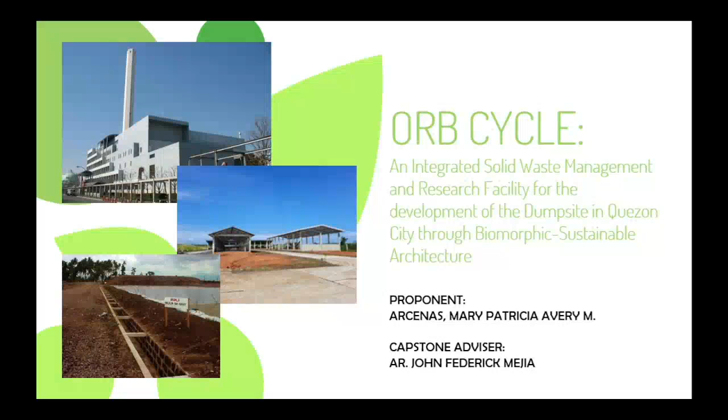An integrated solid waste management and research facility for the development of the dump site in Quezon City through biomorphic and sustainable architecture.

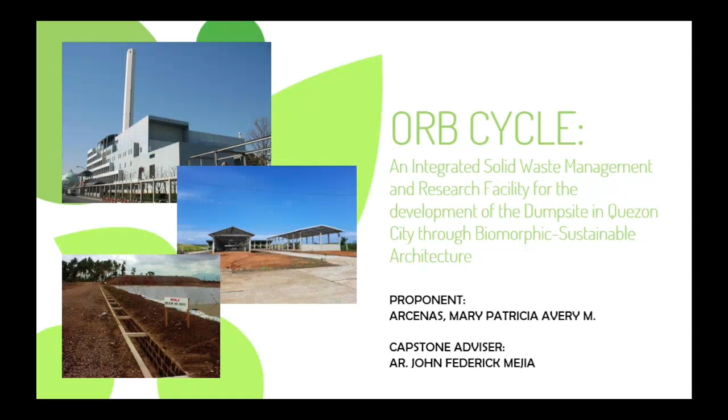Introduction. The Philippines has poor management of waste. Dump sites have been a way of disposing garbage, and the environmental effects on our air, water, and land are contamination and pollution, which have already contributed badly to global warming and climate change. If these dump sites are poorly managed, this can cause various diseases and illness that can spread and affect the local residents around the dump sites.

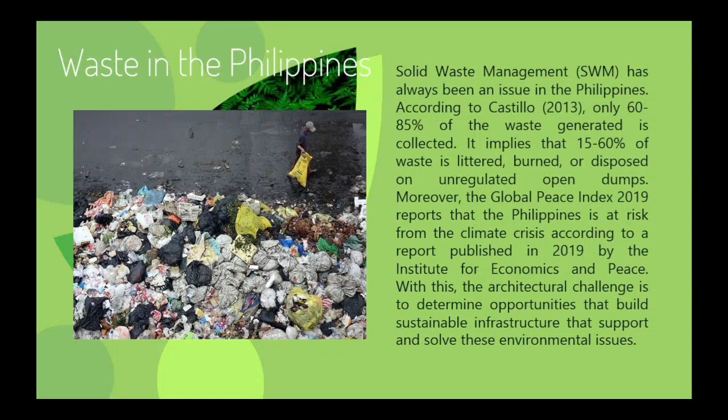Moving on to the project details, the project is a solid waste management and research facility that will embody multiple types of facilities that can handle massive loads of waste in an organized and sustainable process, while giving potential to be developed as a manufacturing site that can process raw materials through the use of innovative and sustainable facilities that are respectful to the environment.

The problem statement is that landfills are a temporary solution and not enough as a way of disposing of waste.

The main points are: how will my project impact solid waste management? What businesses can my project offer? What are the effects of reopening the dump site to the communities, and will it help in reducing environmental, health, and safety risk?

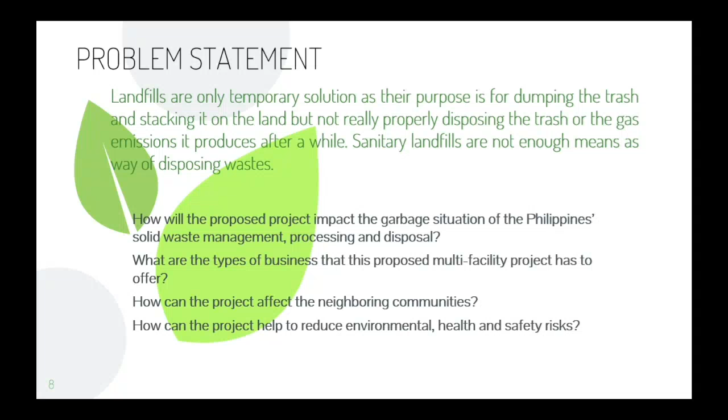Project objectives: to educate communities and support sustainable solid waste disposal research, improvement of the Old Payatas dump site and establishing new facilities related to solid waste management, utilization of the technologies from the sustainable facilities, and environmental awareness and responsibility.

The project scope and limitation is intended for the architectural and health progression of the Philippines, as well as for the encouragement and showcasing of the development of architecture towards industrial structures, prioritizing the perimeters of Quezon City in Metro Manila.

The client for this project will be the National Solid Waste Management Commission, a major agency that manages, controls, transfers, transports, processes, and disposes of solid waste in the country, and the Department of Environment and Natural Resources, a primary agency responsible for conservation, development, and proper use of the country's environment and natural resources.

The case studies that are the basis of the project include the Shibuya Incineration Plant in Japan, which incorporates a new stoker technology with clear gas emission regulations.

San Pablo City Sanitary Landfill and Materials Recovery Facility, which has an in-vessel facility that processes the toxic fluids from garbage and turns it into organic fertilizer.

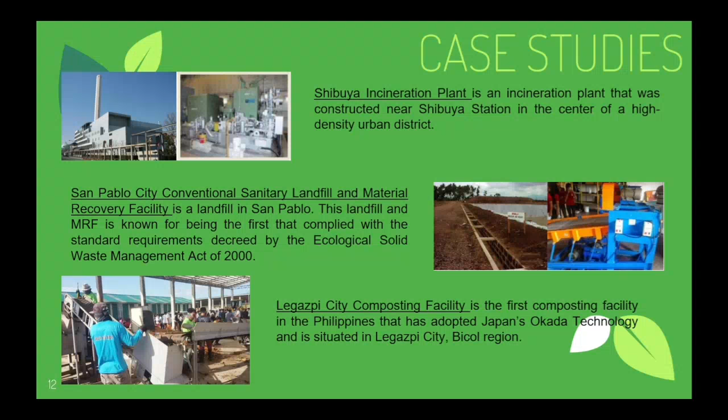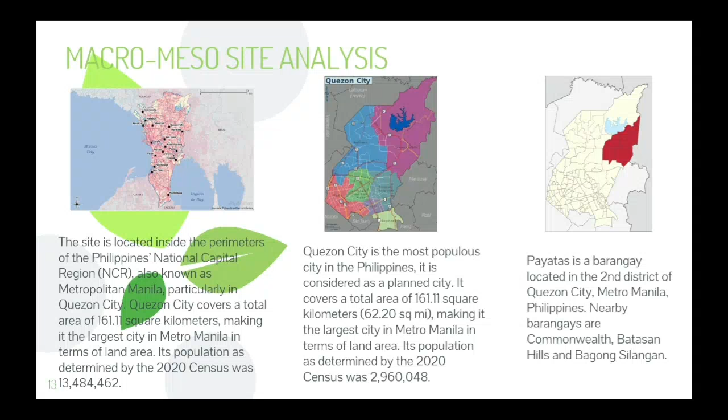Next is the macro-meso site analysis. The site is situated inside the perimeters of the National Capital Region, also known as Metro Manila, particularly in Quezon City, in the barangay of Payatas, located in the 2nd District of Quezon City.

The municipality of Quezon City is the largest city in Metro Manila with a population of 2,960,048. The site is specifically in the 2nd District, which is Payatas, with nearby barangays of Commonwealth, Batasan Hills, and Bagong Silangan. The proposed site is located at the Payatas dump site, specifically the Old Payatas dump site, the upper area indicated on the illustration.

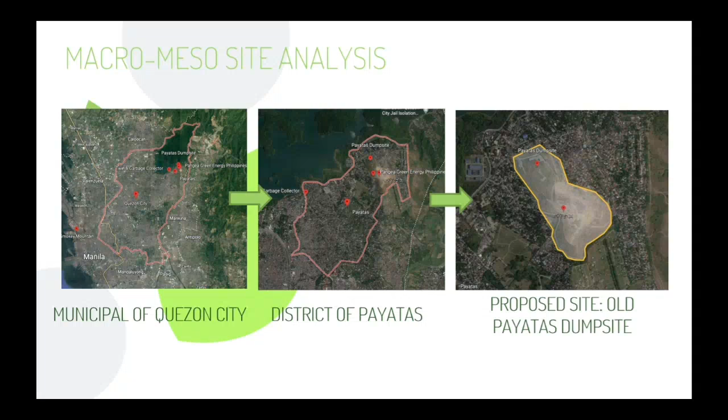Going to the site criteria, discussing the site analysis: the topography of the site is relatively flat with sloping around the previous landfill areas. The geological state of the site has potential for giving much nutrition to the vegetation and landscape of the project. The site isn't prone to any seismic or flooding hazards.

The land use and zoning of the site is industrial according to the CLUP of Quezon City, and is very ideal for the project as the site was previously a garbage dump site. There is a lot of room for future expansion as the site has a total land area of 22 hectares and is located in a progressive urban area.

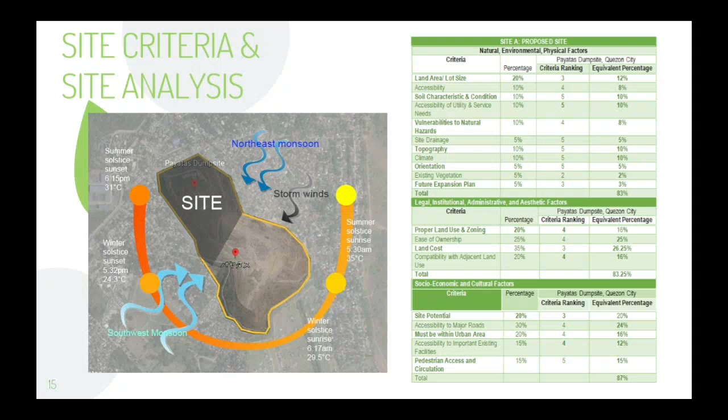The site faces the major road of Visayas Avenue in the north, with Zamboanga and Clemente as secondary streets on its sides. The site also has existing utility links to Meralco and Manila Water.

The SWOT analysis: in strengths, the site has flat areas, it is along roads, it has availability of land for future expansion, and according to the liquefaction and seismic hazard maps of QC, the site has low flood, tsunami, seismic activity, and landslide susceptibility.

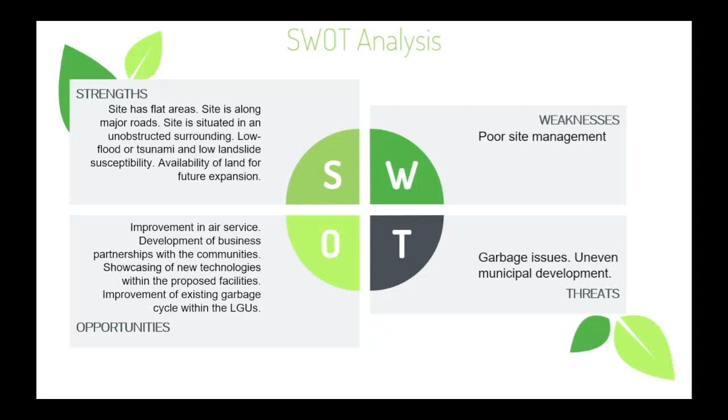The opportunities that can be done on the site include improvement of air quality, development of business, facilities that incorporate new technology, and improvement of the garbage cycle. The weaknesses and threats contain poor site management, garbage issues, and uneven municipal development that the design can work with.

In the demand analysis, we have the projected population with a growth rate of 1.92%, and the waste collected in Quezon City from 2016 to August 2021, including COVID-related waste.

According to the solid waste management profile of Quezon City from DENR, Quezon City has a total population of 2.9 million with 2,645,001 kg per day of waste generation, with 940,496,677 kilograms of waste per year, and a waste generation per capita of 0.88 kilogram a day.

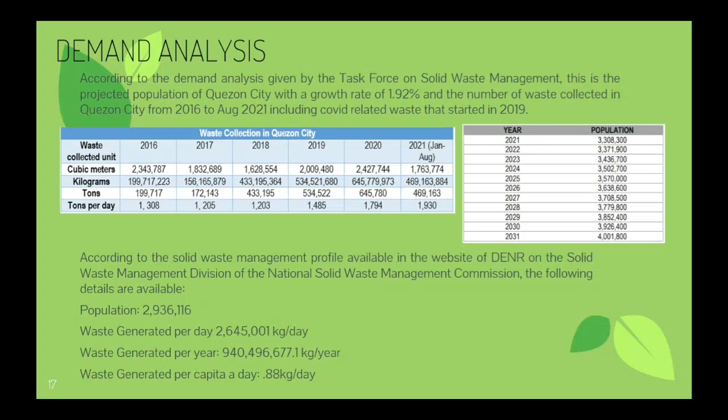This slide contains the formula that was used to determine the waste generation, land area requirement, and the total land area requirement for the project.

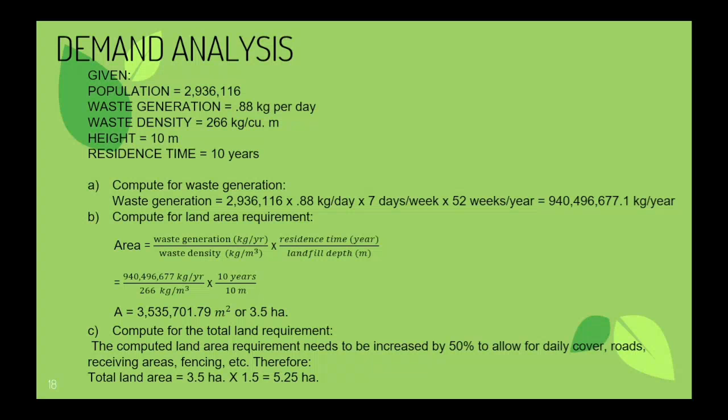Design constraints: environmental and health constraints. The site will experience super typhoons, and the facility itself is a high-risk, toxic, and danger zone. It is a huge challenge to create a design that is resilient to such hazards.

Any harmful displays will be restricted from the design that might compromise the health of the workers, the surrounding communities, as well as the environment in the site.

Social constraint: the primary users are LGUs within Quezon City. The project must be socially acceptable in terms of design, planning, and concept, where it will not create a bad impression or harmful impact to the health of its users.

Structural constraint: this prototype design for the structure will be built with the same features as any normal office, residential, and commercial project, with safety and protection of the primary workers and the community highly considered, given that they are high risk on being around the site or working in the proposed project.

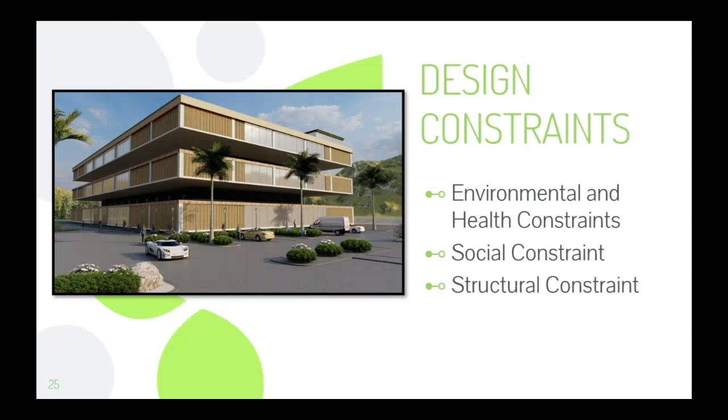Going to the proposed design, the architectural approach for the project is biomorphic architecture, not only because of its shapes and forms that are inspired from nature, but also its purpose of making the design of the project connected to nature, which can contribute to the well-being of the occupants as well as the surrounding community.

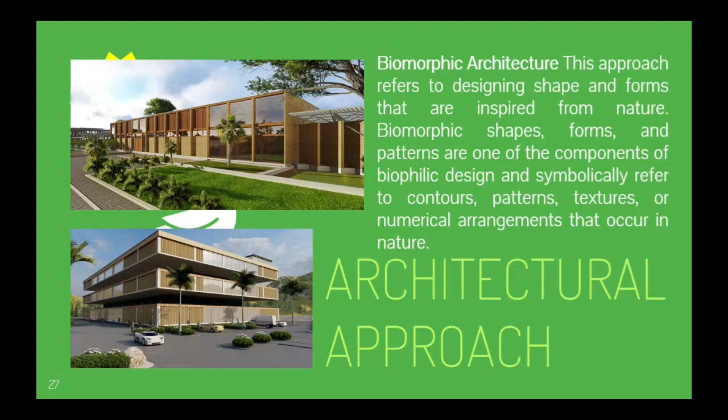Next is the form concept: a beehive that has different sectors made from an array of materials in the place where the bees are. Applying it to the project, the structural form concept of a beehive, or the chronological order of the space needed for the bee colony, is to be applied in the proposed project.

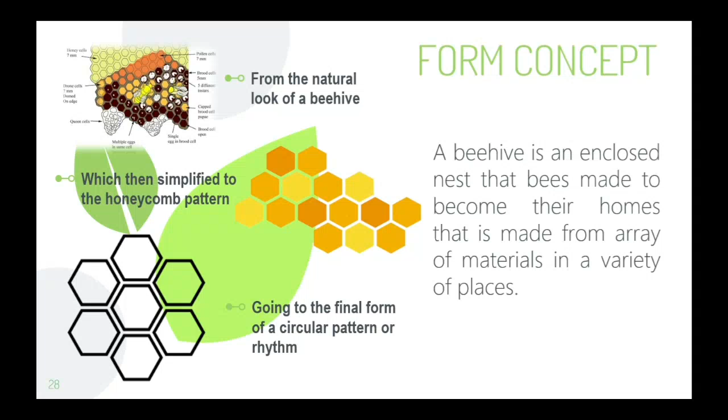As it gives a benefit of space efficiency. What you see in this slide are the design considerations. First, safety: fire exits and safety alarms will be provided for emergency purposes, and an air filtration system and disinfection base as a health precaution.

The site will be provided with CCTV as a form of security to avoid users from any type of threat inside and outside of the property.

Sanitation for providing proper sanitation base and cleaning amenities while handling hazardous waste. Comfort for proper ventilation inside the building to meet the user's satisfaction.

Circulation for proper flow of people and vehicular traffic inside the site, which is very important to consider as this is a solid waste management facility. Accessibility: everything within the project, regardless of disability or special needs of the users, can be accessed, used, and benefited from the proposal.

Audibility: trees and soundproofing building systems are provided to reduce noise coming from the processing machines. Knowledge: to gain more information through informative research lab displays. And lastly, aesthetics, considering the beauty and features applicable for the project.

Next is the structural concept, which is timber and steel. The natural entities of the site may be maximized and preserved throughout the construction phase. Also, this type of construction gives an emphasis on the built relationship between the structure and the environment of the site.

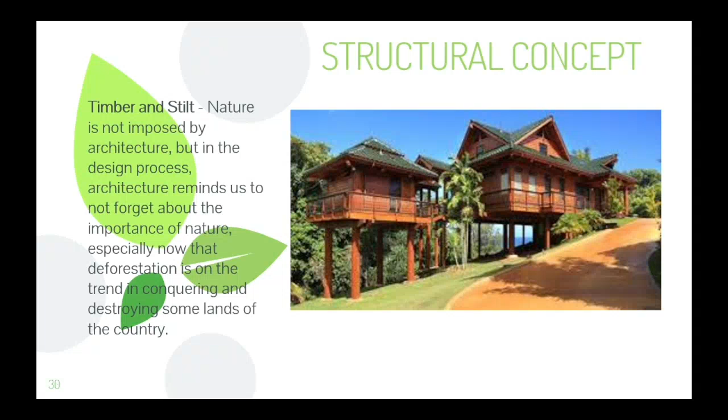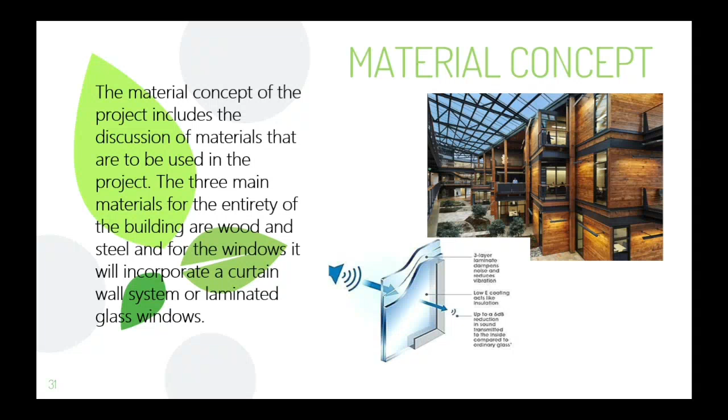The special allied services considered for this proposal to enhance and benefit the composition of the buildings of the project are the Solid Waste Management Commission, the Local Government Unit, Urban Localities, Acoustic Design Services, Facilities Maintenance, and Special Facility Planning and Design.

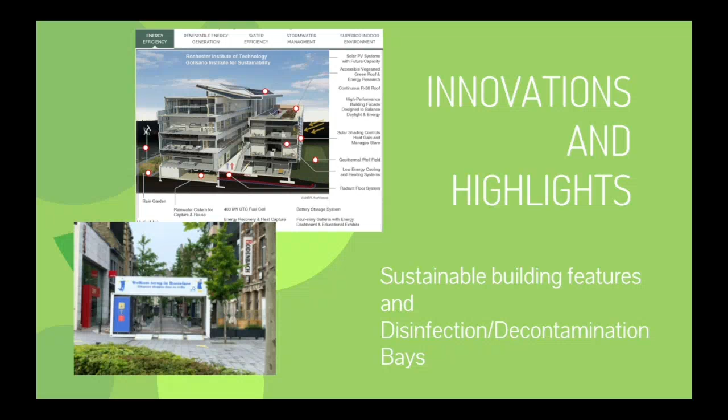The innovation and highlights to be applied in the proposal are sustainable building features and a disinfection or decontamination bay. The disinfection or decontamination bay is an innovation with a goal for the primary users of the project to be safe from getting or spreading diseases to the community.

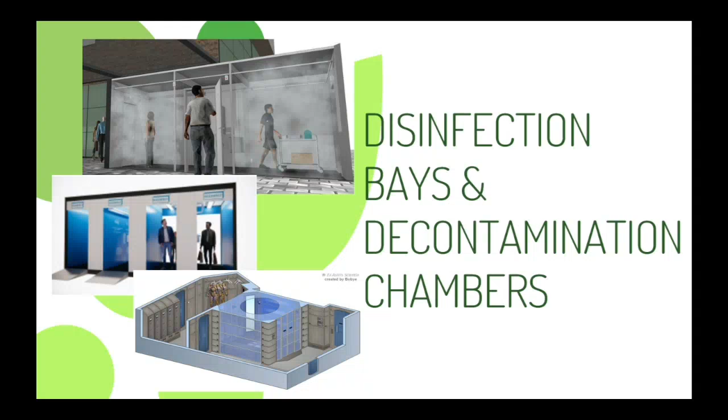So that when they are handling, processing, or disposing of the garbage, it will be an effective way of providing safety and health security that is safe for the environment and to the users of the project. Here are the prominent sustainable building features to be applied in the project.

First is energy efficiency. Limiting the heat energy loss through the day-to-day operation of a building will reduce greenhouse gas emissions through utilized building envelopes like double facade or exterior shell, high-quality windows and wall insulation for air leakage, and heat recovery ventilators to capture heat energy and lighten the load on the mechanical system.

Second is renewable energy generation, using a good building envelope supplemented with an energy-efficient mechanical system with renewable energy generation, like producing electricity. It will reduce greenhouse gas emissions through circulation of energy.

The third and fourth building features work hand in hand: water efficiency and stormwater management are about water conservation by taking advantage of alternative water sources like rainwater or grey water that can conserve water supply through planting of greenery and green roofing systems.

The water collected can be repurposed to flush toilets, for cleaning, and for gardens, and the plants will help with flood control. And lastly, indoor environment: to improve the health and well-being of its occupants, features that improve the indoor environment will include ample amounts of daylight, good acoustic performance, high-quality views, and excellent indoor air quality.

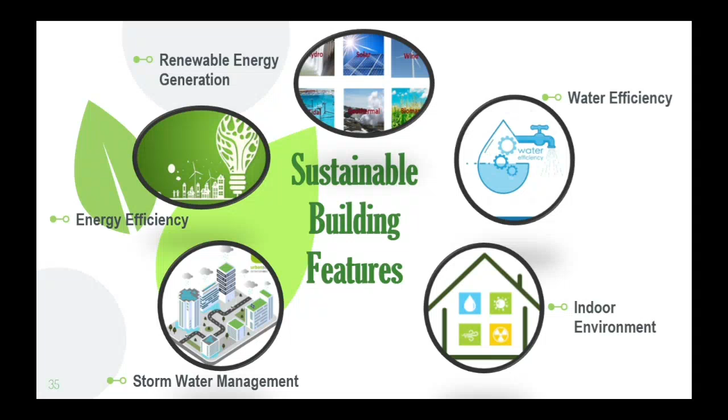That concludes all of the contents of my presentation. Thank you for listening.